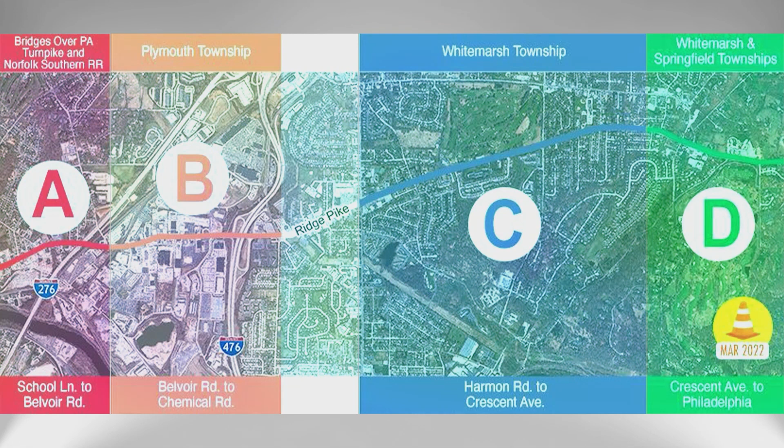The Ridge Pike Improvement Project extends from Norristown all the way to the city of Philadelphia. The project we're talking about tonight is what we're calling Section C, extending from Harmon Road in Plymouth Township to Crescent Avenue in Whitemarsh. It includes intersections at Butler, Joshua, Spring Mill, and Crescent, and we'll be talking about each one as we go forward.

Tonight we're going to talk about the project overview a little bit, who the team is that we have here with us tonight, and go through the preliminary design concept - and I want to emphasize preliminary. We are just at the beginning of the process. Mostly we are looking for your input into the preliminary concept, as well as your thoughts about the issues associated with Ridge Pike going forward.

Just in case you're interested, there's the website. We're going to be putting all this information up on the website as we go forward. Some information is there now, and we're going to be adding to it as we go along.

This section of Ridge Pike is 2.1 miles in length. We are proposing to do what's called a full depth reconstruction. Ridge Pike goes back to colonial days - Washington and Lafayette spent some time out here long ago, and Ridge Pike was here when they were here. It's been expanded, widened, and patched together with tape and glue, but we're going to do a full reconstruction, so by the time we're done, Ridge Pike will be a new road all the way from Norristown to Philadelphia.

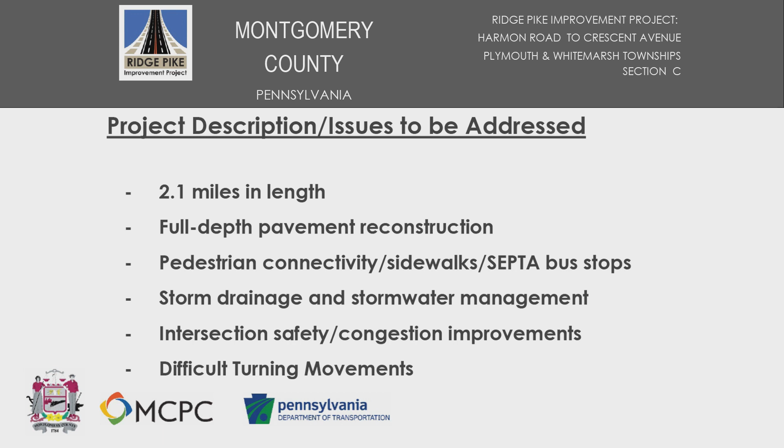We are looking at intersection safety and congestion improvements specifically, but we're also going to look at some of the more difficult turning movements along different sections of Ridge Pike.

This is our schedule right now. We are about midway through the preliminary design process. In preliminary design, you're gathering information - not just traffic counts, but also information about the terrain, stormwater issues, and historic properties. All these bits of information are being collected at this point, and we're trying to put together preliminary concepts in terms of what the problems are and what some of the solutions are as we go forward.

We will be in preliminary design probably for another year, at which point we should have a more refined idea of what the improvements are going to be, and your input will be a big part of that, so please comment freely on all the displays that are here.

Final design is where you put all the details on the plan so that a construction company can actually build the roadway. So preliminary design is gathering all the information, and final design gets you to the point where you can actually construct it.

Construction isn't proposed to start until maybe 2022. It will be at least a 2-year construction process when we get there, but we're a little ways off yet, so I have no real information to give you on that tonight.

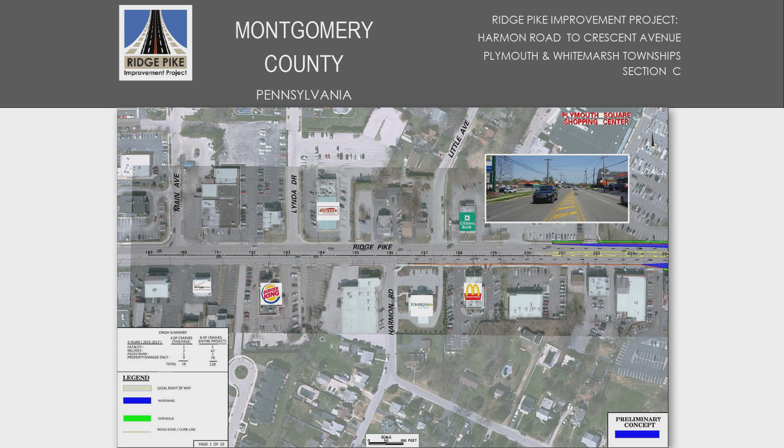There are different sections of Ridge Pike where we see a lot of crashes. When the engineers look at the crash information, they look at the details and can tell if it's a turning movement incident or side swipes because of high speed. They can differentiate what the problem was and why that crash occurred, and that'll help inform our design going forward.

So here's the big first intersection, Butler Pike. All the way around, we are widening on all 4 corners. This will allow us to expand what we're calling the Dunkin' Lane. Anyone who's been to the Dunkin' Donuts knows you've got a skinny little hashed out area there to kind of get out of traffic. We're going to give you a full left turn lane to get in and out of the Dunkin', and we're going to increase the right turn opportunity so some of that right turning traffic can continue to move while the rest of the traffic has to wait.

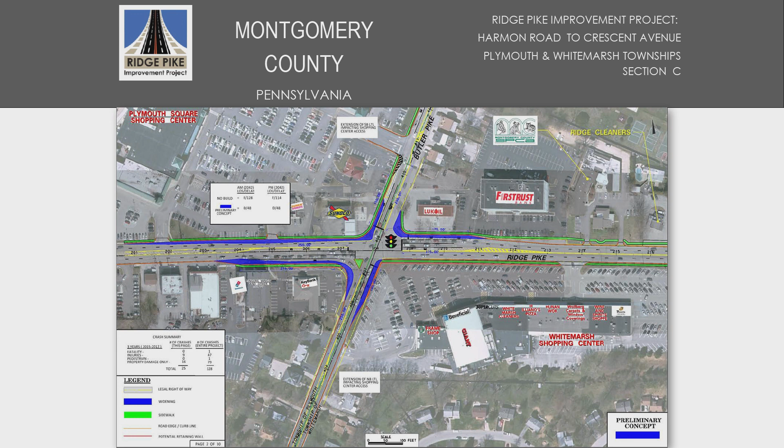We have to address the sidewalk along the front of the Whitemarsh shopping center, and that means we also have to address the retaining wall there. So we are working with that property owner to figure out how to make that work. As we go forward with the process, we will be speaking with more of the property owners individually as we work our way through it.

Moving further east, here's the senior village, the end of the Whitemarsh shopping center with their driveway, and the intersection of Spring Mill Road. On the corner here we have a historic property, the Bellfield Historical District. We have limitations on what we can do on historic properties, and we'll have to work through some of those details with PennDOT as we go forward.

We are also including left turn lanes here at Spring Mill Road. One of the issues with crashes is that people switch lanes very quickly when they realize somebody ahead of them is trying to make a left turn, so they quick jump into the other lane. Those types of crashes are really common along Ridge Pike, so having the left turn lane kind of eliminates some of that jumping back and forth. This section between Spring Mill and Butler Pike is one of the higher concentrations of crashes on Ridge Pike, partly because there are so many commercial driveways.

Every commercial driveway presents conflict points for turning traffic, so you can kind of expect that to be the case. Our level of service at Butler Pike is an E and F now in the AM and PM peak, and we're going to improve that to level of service D in both peaks. That doesn't sound like a lot of improvement, but it goes from about 180 seconds average delay down to 40 some.

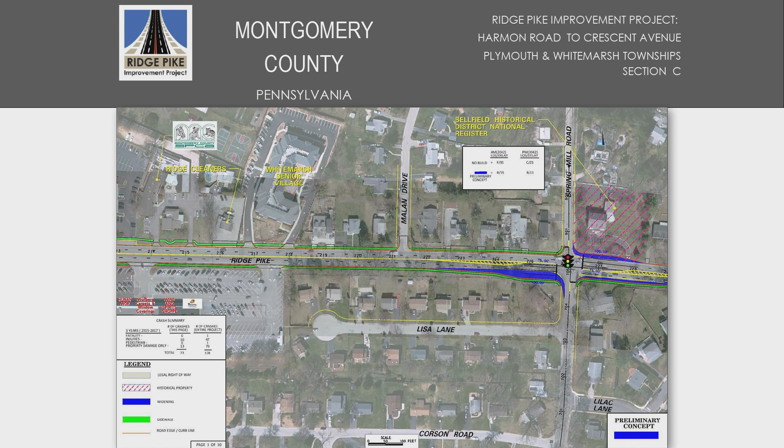So it is a pretty significant improvement. And here at Spring Mill also, in all cases, the levels of service go from failure in E and F to an acceptable level of service.

So moving further east, here's Bellfield now on this side of the page. We are not proposing a lot of widening through the central part of the corridor, mostly because these are very large properties and you don't have a lot of generation of pedestrians in these locations.

We are putting a sidewalk on the south side. We do have a lot of residential properties on the south side of Ridge Pike, and we know that in this section we also have transit users who cross Ridge Pike there. So this continuation of that section has a sidewalk on the south side and reconstruction of the roadway, but still just 2 lanes in each direction through this section.

I'll note here too that we have been working with SEPTA from the very beginning of this, so for those people who use transit through here, we are evaluating whether the stops are in the best locations or whether they could be moved to a safer location, as well as whether all of the stops are really needed, or maybe we need different stops someplace else. So we are working with SEPTA to refine their service through here as well.

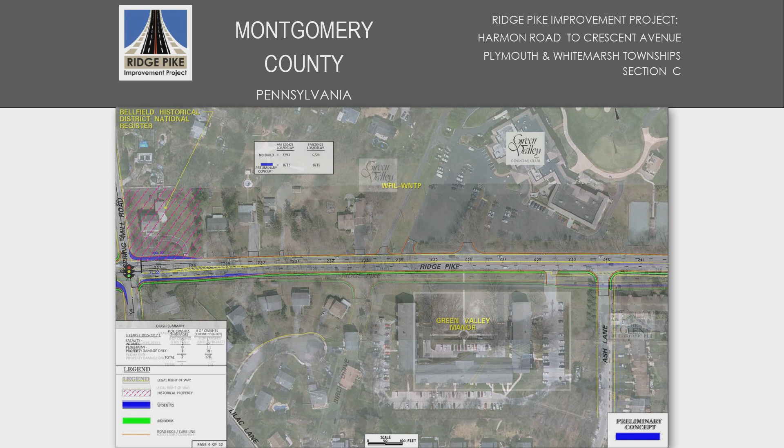Here again, we're right on the edge of the country club. When we're coming up to Joshua Road on this side, you can see where the widening begins to occur, east of Birch Drive.

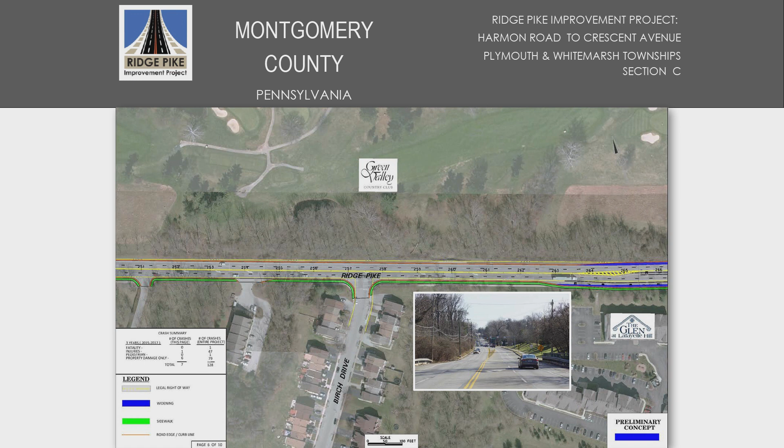And here at Joshua, how many people like that single lane at Joshua? We are going to add a second through lane there. That configuration that's out there now was done as a safety improvement, because people jockeying back and forth to avoid left turners was creating a lot of accidents and crashes. So the decision was made years ago to channelize it down to 1 lane and allow a separate left turn lane. It did reduce a lot of the crashes, but it also created a lot of congestion.

So going forward, we'll have 2 through lanes here and a left turn lane to the west as well. Here we have a fairly significant right turn lane indicated in the preliminary concept. We know that's really close to those residences. We will be reviewing the right turn lanes going forward to ensure that they're necessary and that we aren't encroaching too much onto people's front yards. But there will be a left turn lane on the northbound side and on the southbound side.

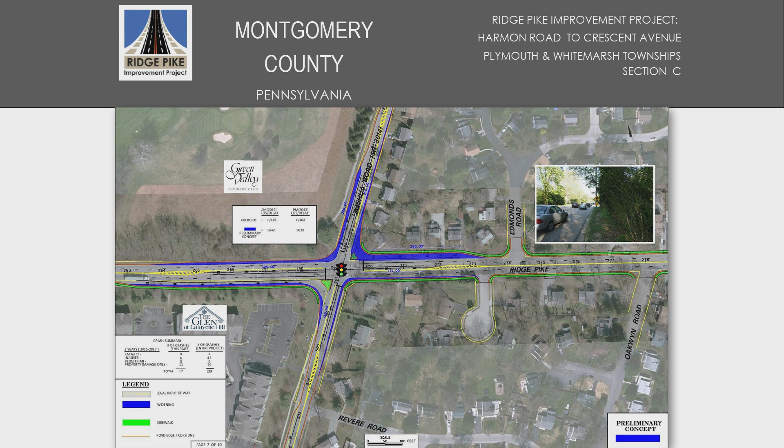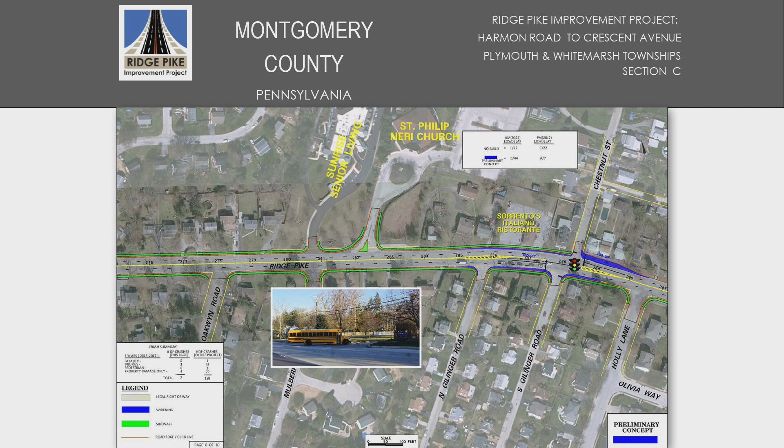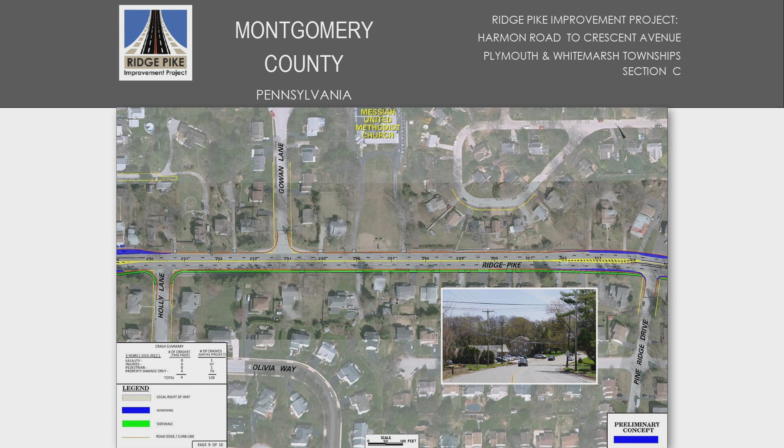Moving further to the east, here's Holly and Gowan. Still just 2 lanes in each direction with a sidewalk on the south side, the green line.

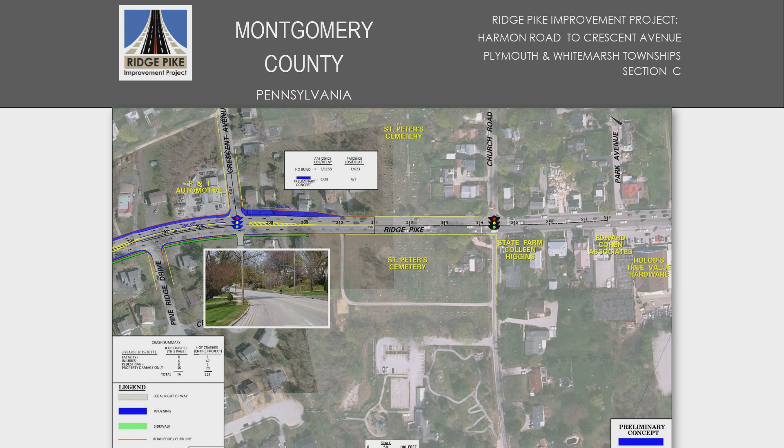From this point further east, this is section D, and we've had a couple public meetings for section D over at the Whitemarsh Township Building. So if you have questions about that, we can talk a little bit about that after the presentation, but this is where we're going to stop right now.

So here's the schedule again, just to remind everybody where we are. We are in the middle of the preliminary design phase, so we have a ways to go. None of this is written in stone yet. There will be changes for sure, and we will try to keep the public as informed as possible as we make those changes.

It's likely that within another year or so, as we move into the final design phase, we'll propose another public open house like this, so you'll be able to come see how we've progressed and what we're pushing forward into the final design phase. So we have a lot of team members here tonight.

Greta Riley is here. She's the Director of Roads and Bridges for the county. She's around someplace. Matt Edmond is the Section Chief for transportation, he's in the back there. He's my boss. My contact information is up here. If you have specific issues or questions you want to talk to somebody about going forward, you can always contact me. Our county engineer is McCormick Taylor, and Susan Geisinger-Cologne is here someplace as well, over on the side. Again, there's our website at the bottom.

We are in coordination with PennDOT, so we do have a PennDOT project manager. George is not here tonight, but our engineers are RK&K, and Colleen Carmichael is here. She's our chief project manager for this project, and her whole crew is here. AD Marble is doing all the environmental work, and Colleen Meswich is here as well, someplace in the back. She will be responsible for looking into the historic properties and those types of issues, which are all part of the environmental evaluation. And Boles Smyth Associates is here. Mike and his crew are all here as well. They are doing a lot of the traffic analysis and trying to help us decide exactly where we need extra lanes or whatever it is we do need.